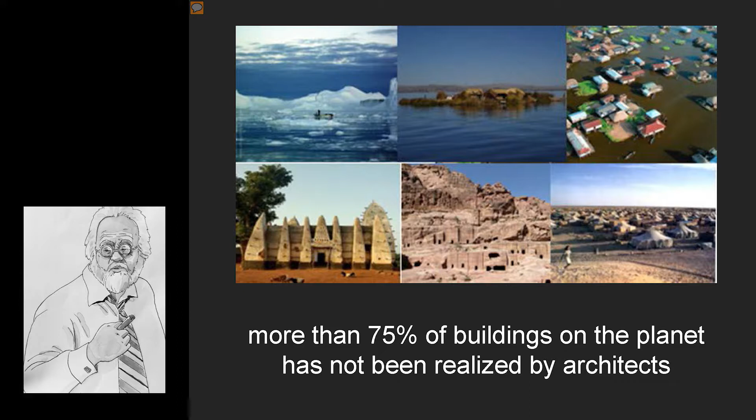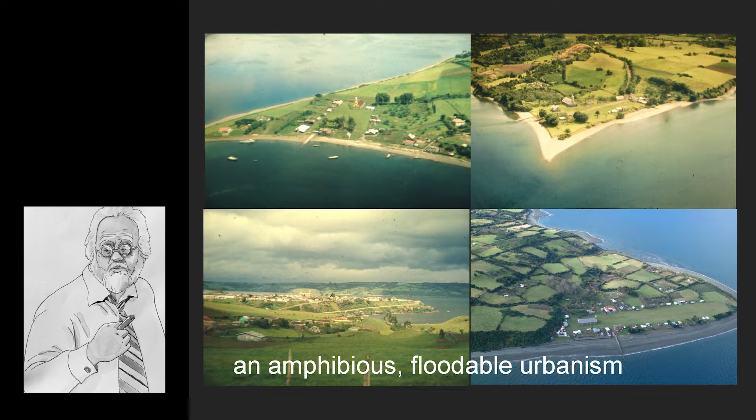So the church, this typology of church, was brought by the Franciscans - the order of San Francisco - in the 17th century, and they brought this typology. The idea was that the tower had to be seen by people coming by boat and by earth. And there was a very rich typology - they worked a lot, you can see the differences, a rich typology.

And sometimes a very cultured typology too. In this case, they tried to reproduce marble - they had never seen a piece of marble, naturally, but it's their own interpretation of marble. This was done by an Italian architect from Brera. It was designed in masonry, but it was built in wood. You see, this is a Baroque church.

And these are the poorest churches in the middle of the countryside. The technology is absolutely the same to build boats or churches. You see, boats, right, and churches as a boat.

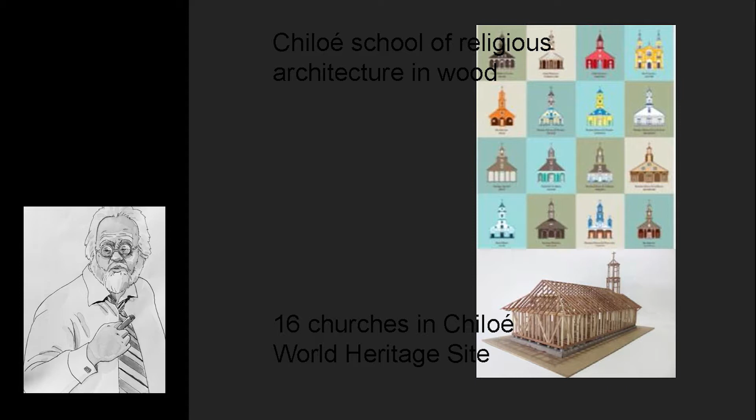The church - they asked us to create this project, a small, well, not so small theoretical problem, because we have to reproduce exactly one of these historical churches in this place. Now, 16 of these churches are declared World Heritage. So we decided...

This is the client, and this is the church that they wanted us to reproduce. These people, without a church, without a cemetery, couldn't continue living there in these situations. Also, the idea was to continue bringing people to live there.

So we decided to build the structure of this building using no nails, no nails, using the building site, la obra, as a school.

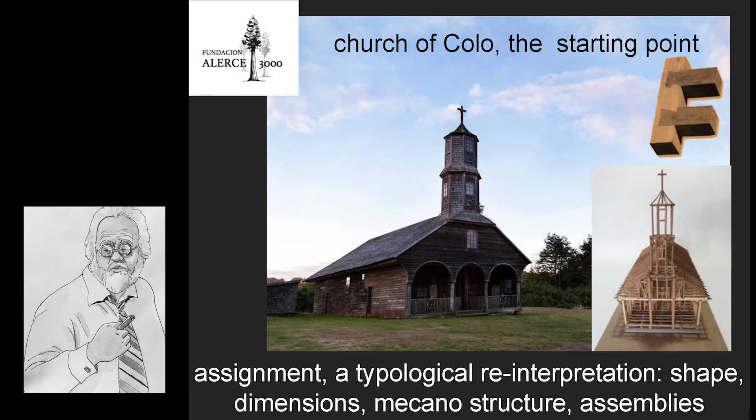Now we had to cross the sea, the interior sea, and arrive here. These are the mountains. This site is really small, and here there's the sea. This is the church we're building.

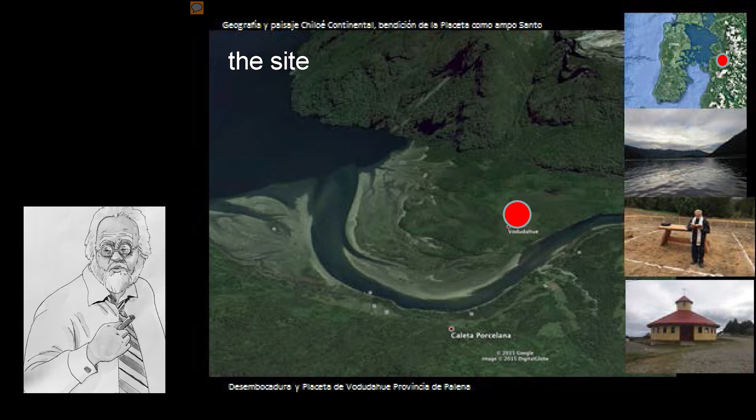The site is this one, the priest declaring, go ahead. And where we had to make a survey, medir, to redraw, to take all the measures, absolutely.

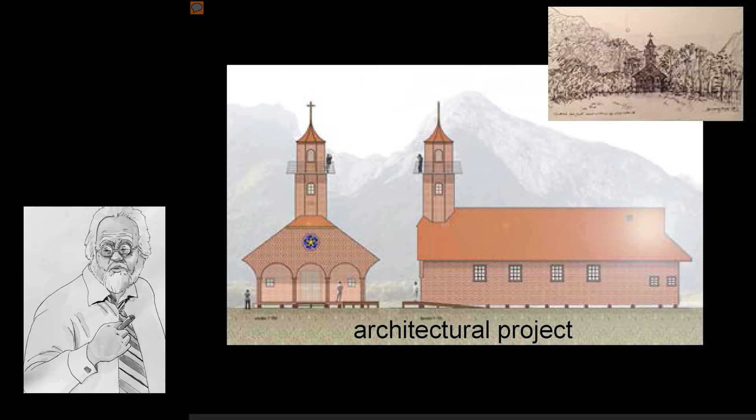This person wanted small changes. Normally, the tower of the church is a reference for people going by boat or walking. But in this case he wanted the opposite, that from the tower you could see all the landscape. So we had to build a balcony there. It's a small change.

One of the things we made was a book, with all the solutions for each assembly, joint and wood. They're very special, you will see.

We made a book, we built all these joints at scale 1:1, and in the construction we decided to create this technical path so people can go there and see all the details, all the construction solutions. It's very simple: just a portico, three naves, and that's it.

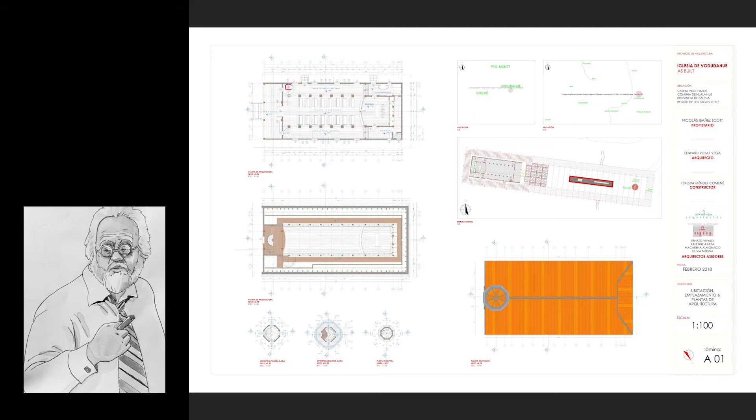The function of the tower changed, which meant we had to build a stair, a very special stair. That's the special stair. We drew it, we designed this church, this stair, and this is the technical path here around it.

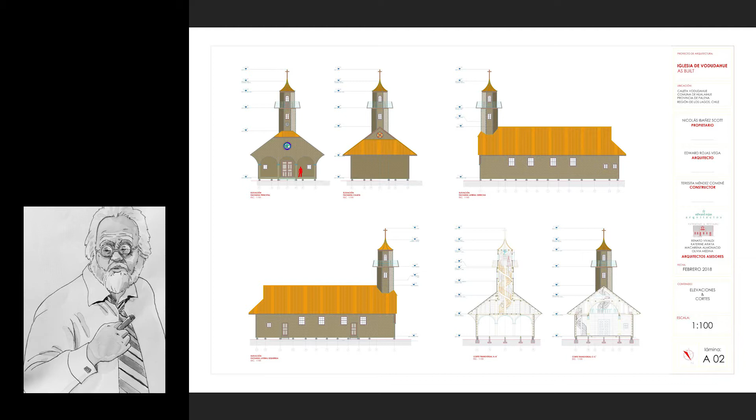And to go there, we had to build this. I don't know if you see it. Well, it's not quite right, see.

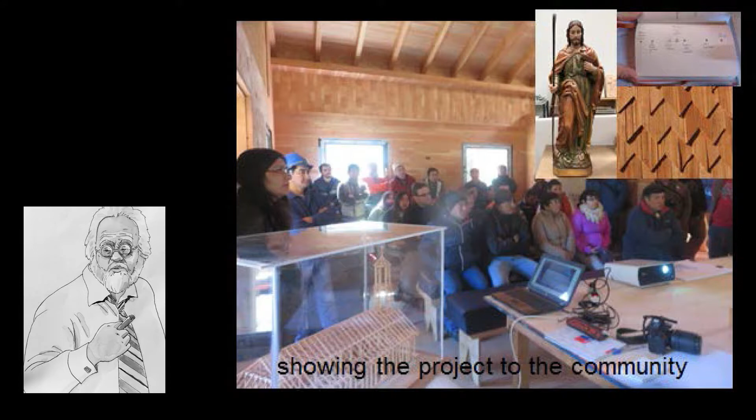This is a moment where we presented the project to the people living there, with a maquette. In this moment, we decided on the image for this church, and some details we would use in the construction.

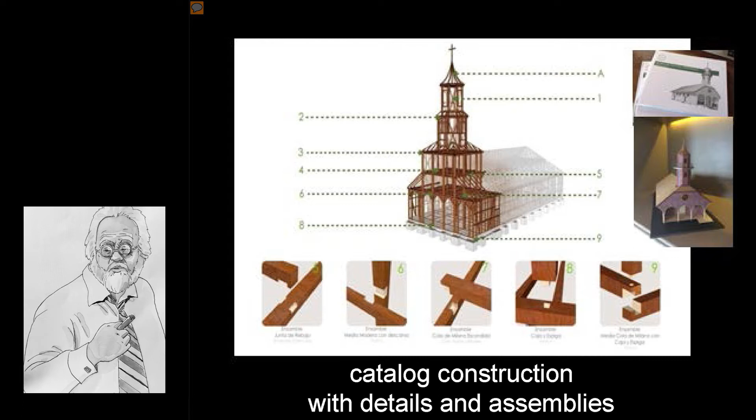This is part of the book, and you can see some details we drew here. Look, that one is very interesting. From this one you can recognize number 9, you can find it there. Number 8, you can find it there. This was a book, really.

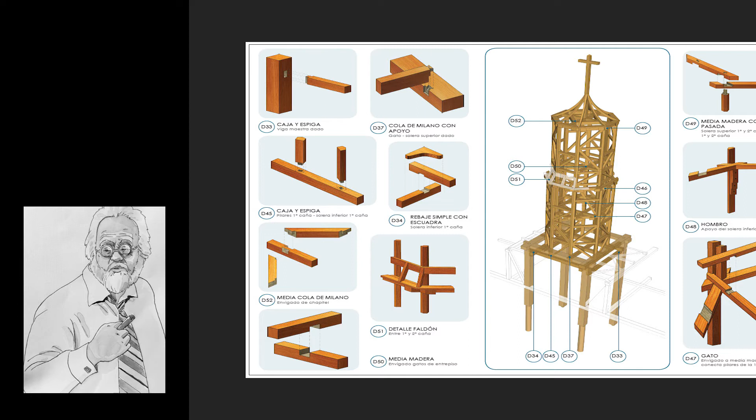All our details we designed, and we built them, as I said, at scale 1:1, each one. These details, these sculptures, remain there because we created a school for carpenters.

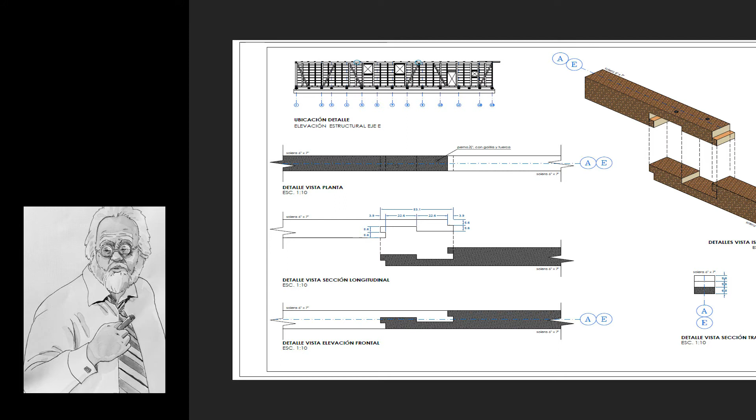This one is very interesting too, also that one. Look at that one, it's very nice. And these are not nails, huh? This is just wooden pieces. That one is also very interesting.

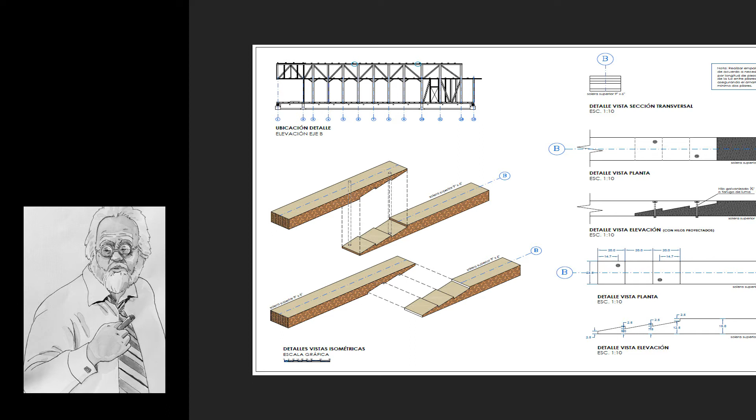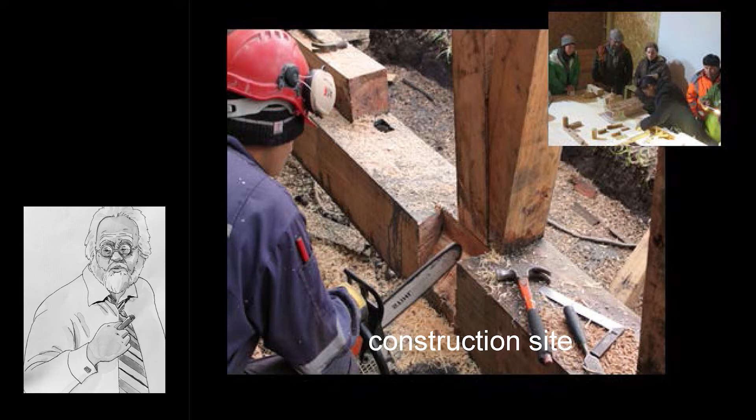We reinterpreted some traditional solutions and gave them more complexity. You can see the size of the pieces here, and here they are studying with a model, and the pieces reproduce 1:1 the way to build it.

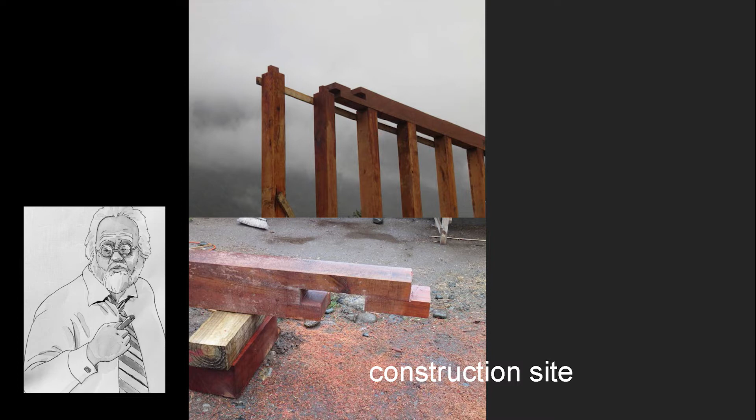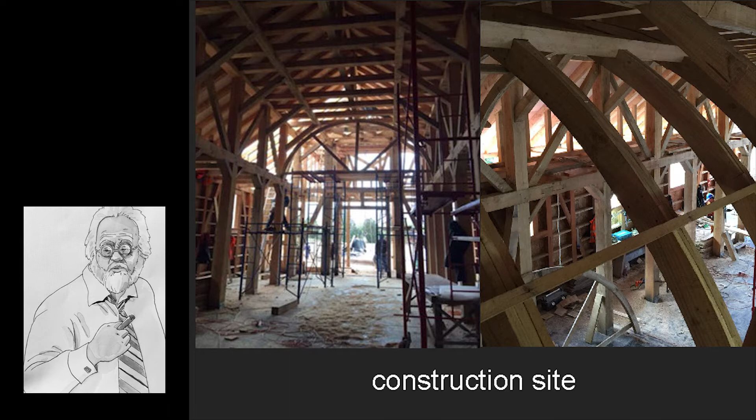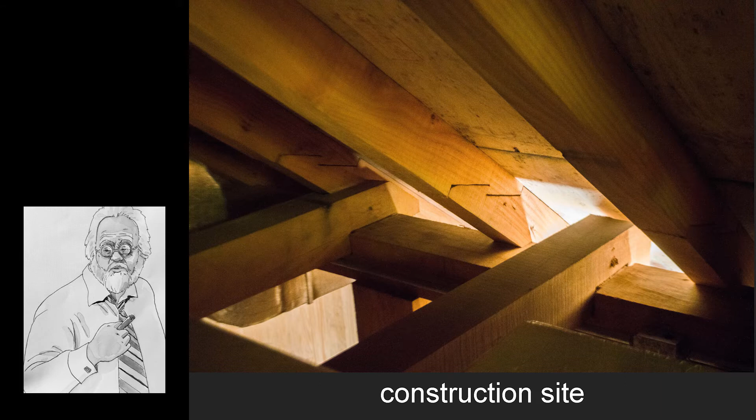There is one of the details. Also here you see these pieces. This is what you can see from the path, the structural path. You can see all these details when you walk around this, and also that one.

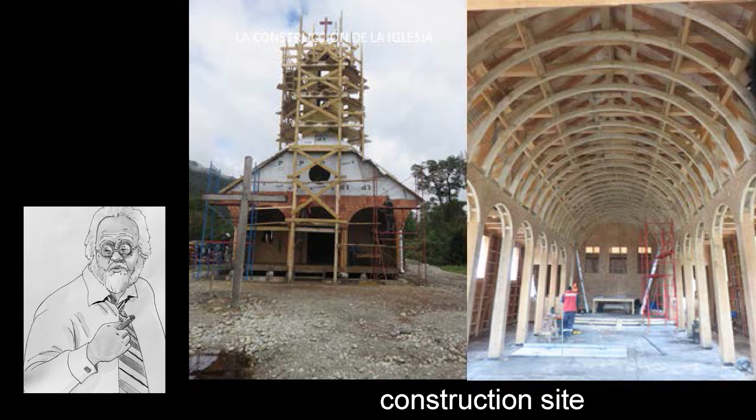This is part of the interior, naturally. All these buildings, they rest, sitting over a big stone. In this case, they wanted us to build a cement foundation, but it was not necessary.

In this project also, it's very cold here, so we put insulation, solar panels, pavement, everything. In this project we used the original design to produce a new building without using nails and with very, very contemporary technology.

The interior, do you remember? It was many-colored. So we decided to change, not to use these colors. Maybe they will add them later, we don't know when, but instead we used the color of the different kinds of fine woods we could find there.

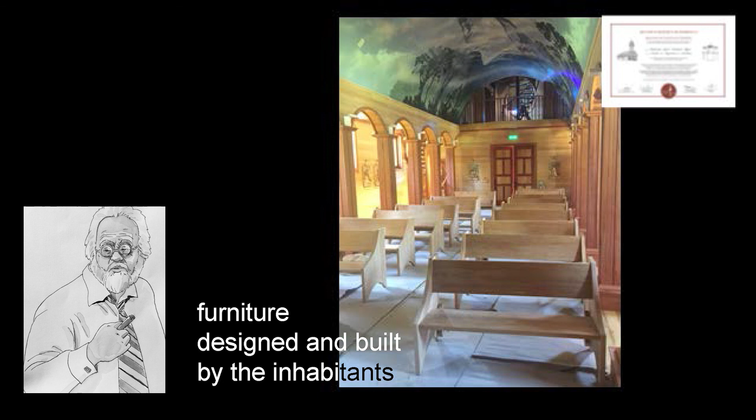This is the technical path, and this is the new old church, rebuilt or built. Thank you.